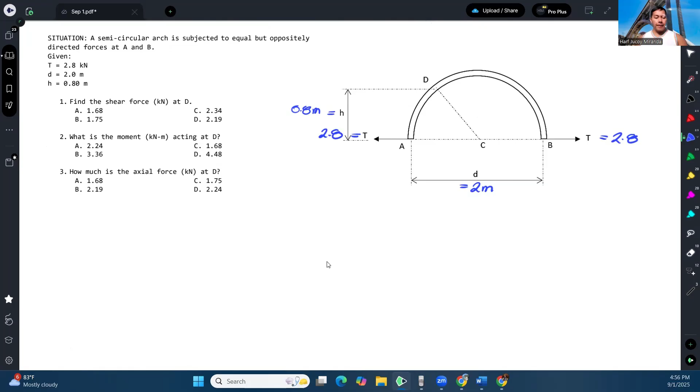Situation. A semicircular arch is subjected to equal but oppositely directed forces at A and B. You're given the value of T, which is 2.8 kilonewtons. You're given the diameter, which is 2 meters. And lastly, yung H na 0.8. Pinapahanap yung shear force, moment, at saka axial force sa point na to.

Okay, so to solve for those forces, we can consider all these forces, guys, to be internal forces. Lahat yan, internal force na shear, tsaka internal force na axial, tsaka internal moment. So the reason why I mentioned internal kasi currently hindi natin nakikita yun dito sa free body diagram na yan. So in order for us to expose those internal forces, we must apply method of section.

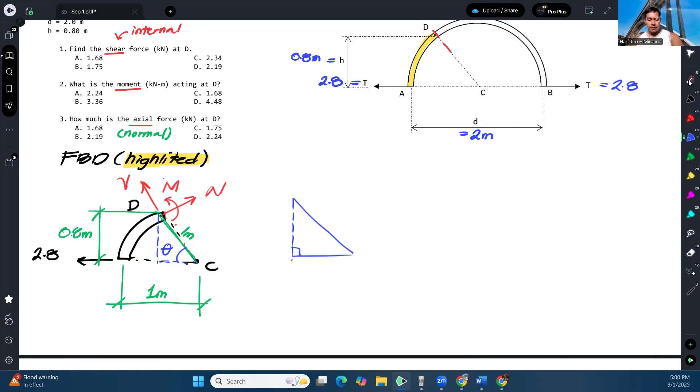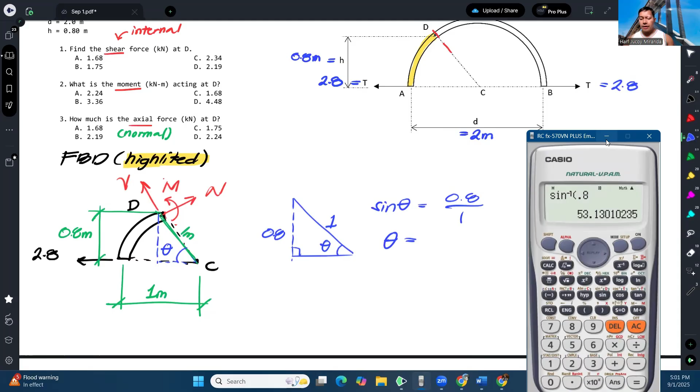So ang una natin kailangan gawin is hanapin tong angle na to o di kaya yung slope. Angle na lang kukunin ko. To calculate that angle, we must consider a right triangle. And I think we can see that if we draw a vertical line here, makakabuo tayo ng right triangle. So this is theta. This is 0.8. This is 1 meter. So we can use sine function. Sine of theta is equal to 0.8 over 1. So theta can be calculated. That's 53.13 degrees.

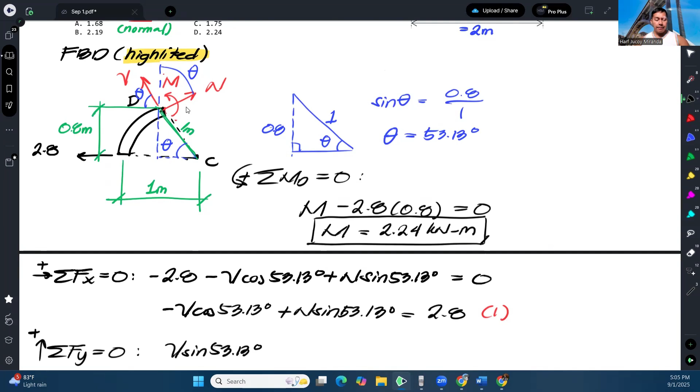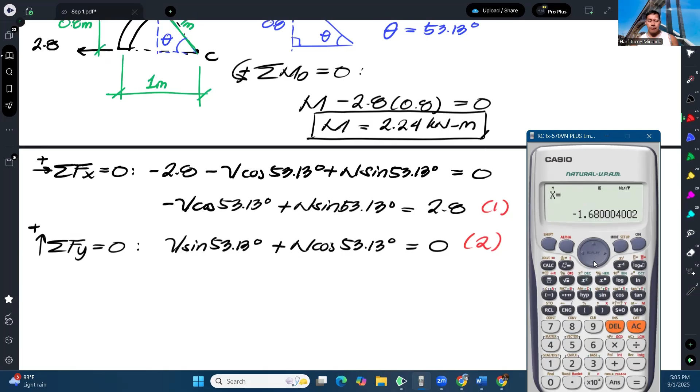Let's produce another equation galing naman sa summation of forces y, assuming upwards positive. So wala naman tong y component. Ito na lang, V sine theta upward. And then yung N naman natin ay also upward, N cosine theta. And call that equation number 2. Okay, so with that, we can solve them using mode equation, two variables. So negative cosine 53.13, sine 53.13, and then 2.8. For the second equation, sine 53.13, cosine 53.13, tapos 0. So that gives us negative 1.68 for shear, tapos 2.24 for N.

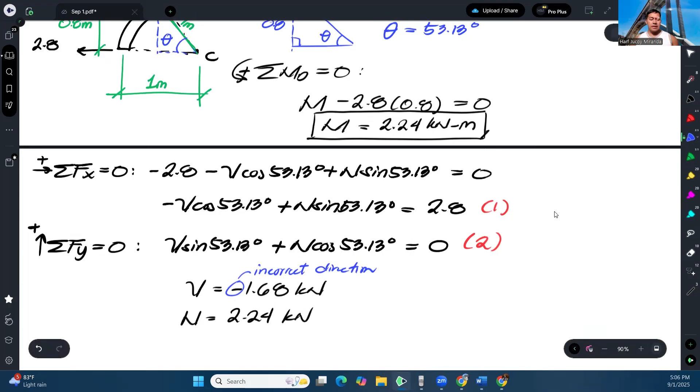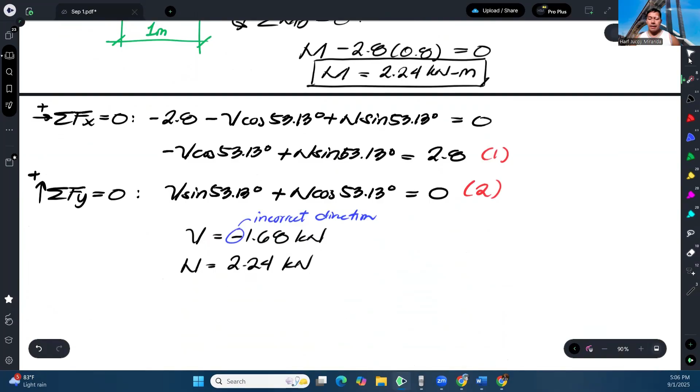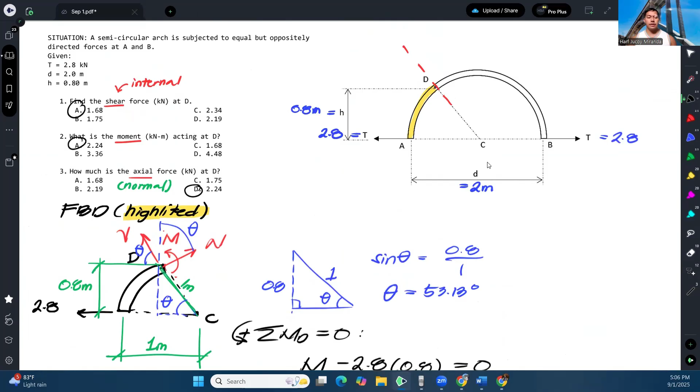Okay, and by the way, the negative sign here means incorrect direction. So ibig sabihin lang nun, mali yung inassume ko na direction ng shear. Opposite dapat. Pero the value is correct. So we can accept 1.68 as our answer. Hindi naman din kasi tinatanong kung anong direction. Tinatanong lang what is the magnitude of the shear and the axial force. And that's how we solve this problem.